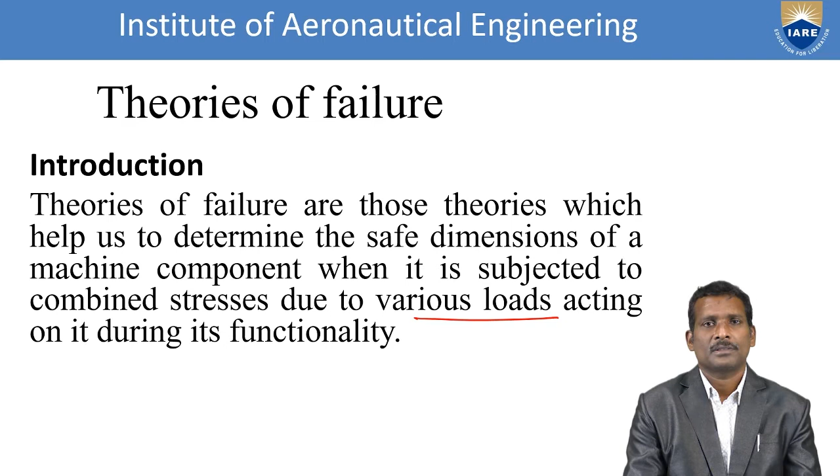So safe dimensions. That's why we use the theories of failure to determine the safe dimensions of a machine component. These theories of failure are very important in design of machine elements; they play an important role. Some theories were derived, and the important theories we will discuss now.

Some examples of such components are as follows: IC engine crankshaft, shaft used in power transmission, the spindle of a screw jack, bolted and welded joints, and ceiling fan rods. These are some examples only. You can also take the piston, the connecting rod and the crankshaft, and then clutches and brakes. These all are machine components and design elements.

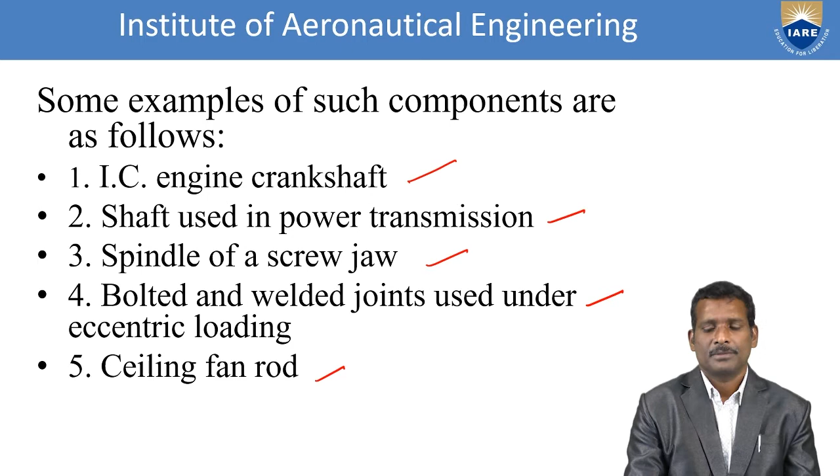The theories of failure play a key role in establishing the relationship between the stresses induced under combined loading conditions. Combined loading means sometimes the component is subjected to bending load only, sometimes to torsion load, and in other cases torsion as well as bending combinedly act on the component. These types of loads are called combined loads.

In this condition, the properties obtained from the tension test, like ultimate tensile strength and yield strength, which we have calculated from the UTM, are standard tensile test values. For establishing the safe conditions in theories of failure, we use these stresses. Relating the stress induced under combined loading to the yield stress and ultimate stress obtained using the tension test is what are called theories of failure.

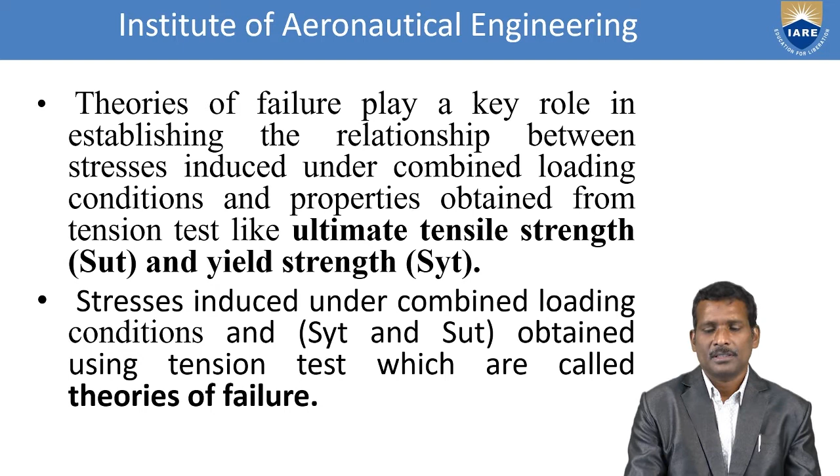Various theories of failure are there. One is the maximum principal stress theory, also known as Rankine's theory. The second one is maximum shear stress theory, also called Guest's theory or Tresca's theory. The third one is maximum principal strain theory, also called Saint Venant's theory. Then the total strain energy theory, Haigh's theory, and the maximum distortion energy theory, von Mises and Hencky's theory. These theories are derived using experimental results.

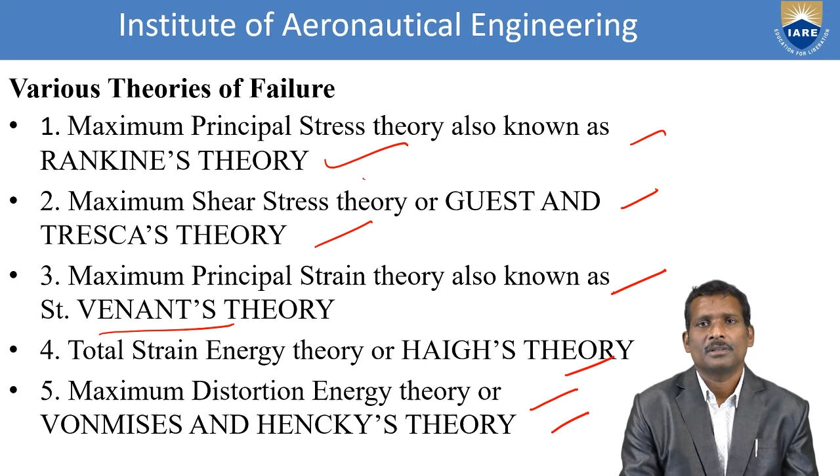Out of these theories, frequently we use the maximum principal stress theory, Rankine's theory, the maximum shear stress theory, and von Mises and Hencky's theory. All are important, but it depends upon the application. First, we'll discuss the maximum principal stress theory. What is the safe condition for this maximum principal stress theory?

Suppose you want to design a shaft using this maximum principal stress theory. Designing a shaft means determining the safe dimensions of the shaft. What are the important dimensions of the shaft? The diameter. The diameter is a very important parameter in a shaft; the length may change. So that's why the condition.

What is the condition for failure? The maximum principal stress value and factor of safety equal to 1. What is the condition for safe design? The factor of safety greater than 1. The factor of safety value should be greater than 1 only. So to avoid failure, for safe dimensions, you have to take the principal stress value with a factor of safety always greater than 1.

The maximum principal stress must be less than or equal to the permissible stress, where permissible stress is equal to failure stress divided by the factor of safety. So this is the condition for maximum principal stress theory: sigma 1, the maximum principal stress, is less than or equal to failure stress by factor of safety.

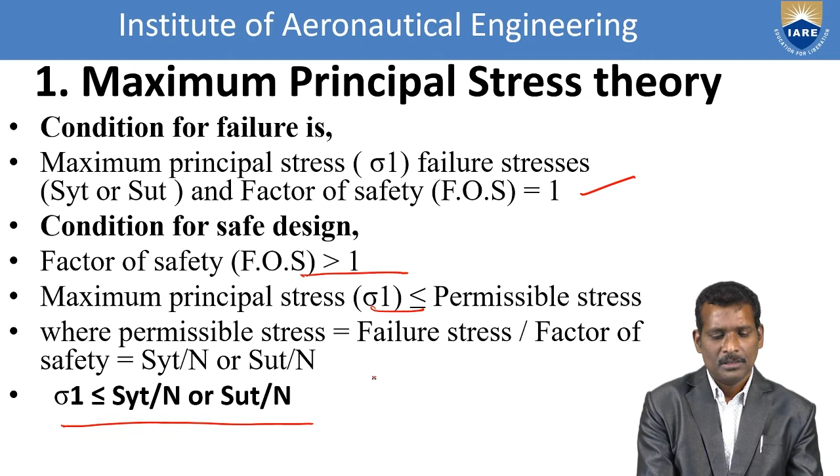This theory is not suitable for ductile materials, suitable for brittle materials only, under triaxial or biaxial loading conditions. Sometimes the component is biaxially loaded or triaxially loaded, so this is suitable for both conditions, because brittle materials are weak in tension. This is not suitable for the safe design of machine components made of ductile materials, because ductile materials are weak in shear. That's why the maximum principal stress theory is used for brittle materials only.

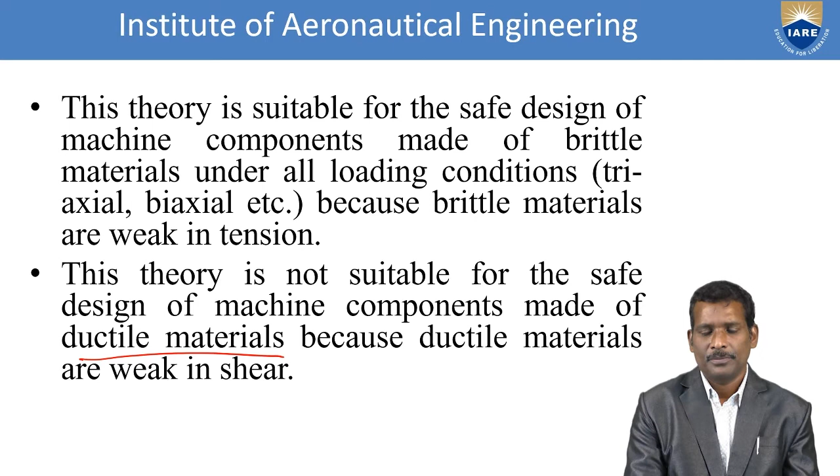But in some cases, this theory can be suitable for the safe design of machine components made of ductile materials under the following states of stress only: uniaxial state of stress and biaxial state of stress, when principal stresses are like in nature. The absolute maximum shear stress is equal to half of the principal stress value. One more condition: under hydrostatic stress condition, the shear stress in all the planes is 0.

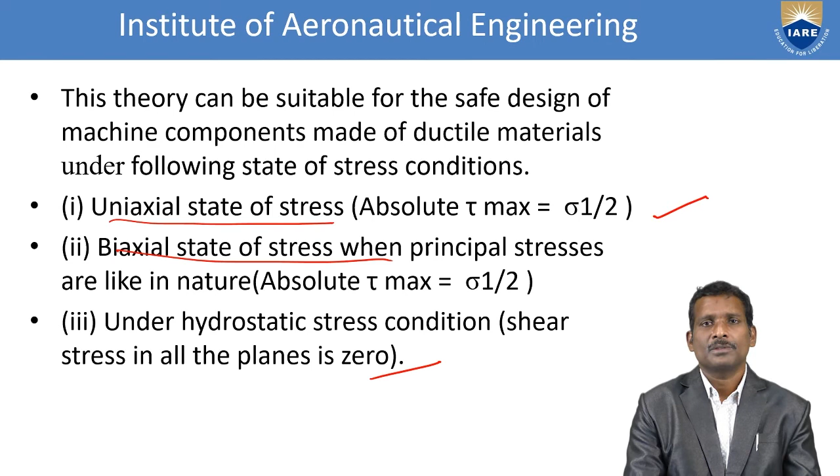Whenever the component made of ductile material is subjected to loading under the following stress conditions, uniaxial, biaxial, and hydrostatic, then only you can use this maximum principal stress theory. Otherwise, you can't use it.

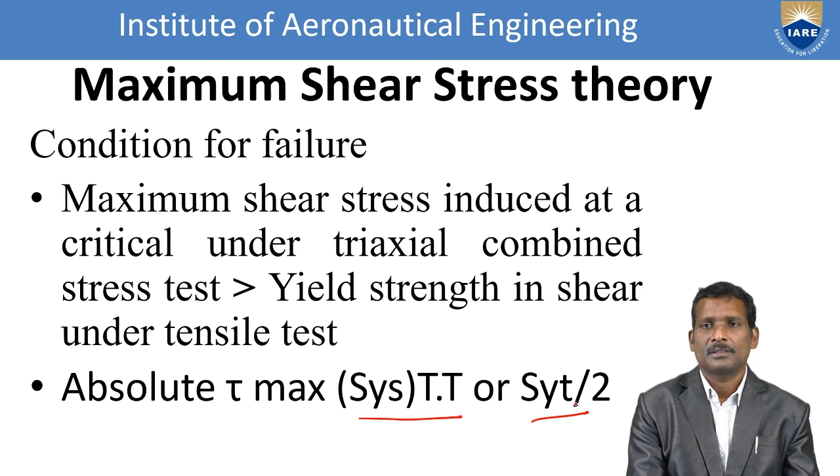Next, the second one is maximum shear stress theory. First, we will see the condition for failure and the safe condition. Failure occurs when the maximum shear stress induced at a critical point under triaxial combined stress is greater than the yield strength in shear under tensile test. The absolute maximum shear stress under tensile test is equal to half of the yield stress.

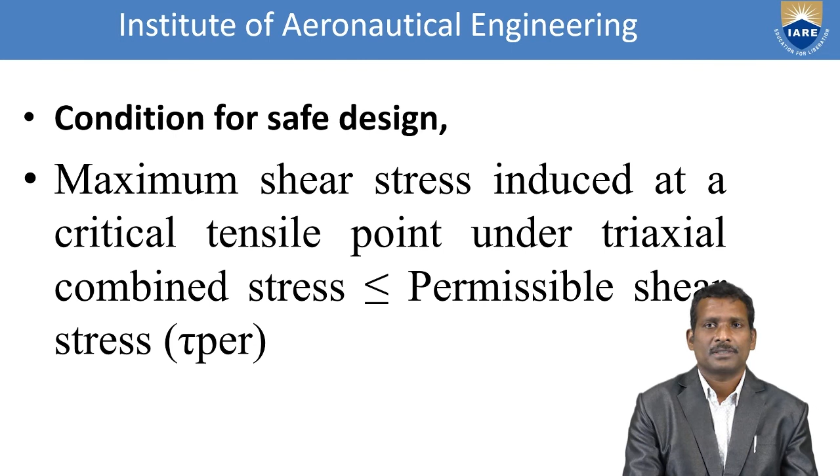The condition for safe design is that the maximum shear stress induced at a critical point under triaxial combined stress is less than or equal to the permissible shear stress. The permissible shear stress you can calculate using this relation. So the condition is shear maximum less than or equal to yield shear stress in a tensile test.

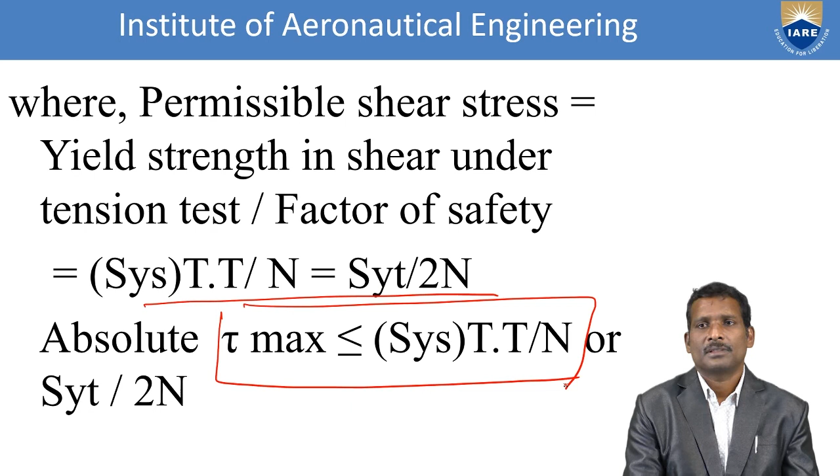For triaxial state of stress, take the larger value of these three: sigma 1 minus sigma 2 by 2, sigma 2 minus sigma 3 by 2, and sigma 3 minus sigma 1 by 2. Whichever is higher, that value should be less than or equal to the yield shear stress, 0.5 times SYT, upon factor of safety.

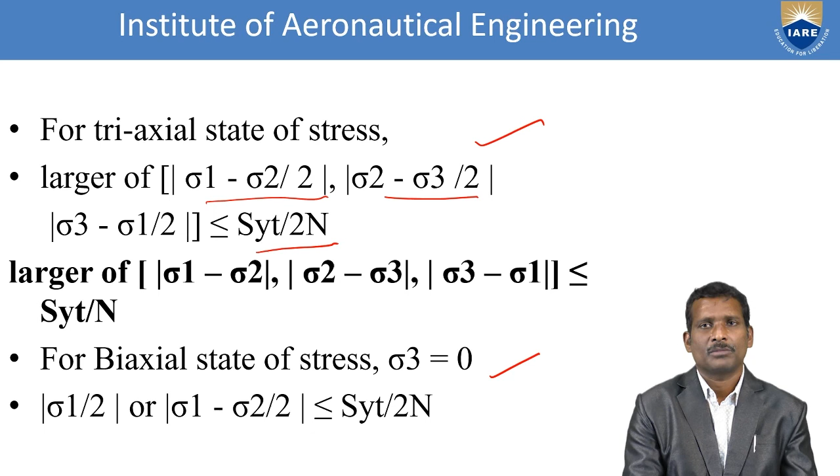That is for the triaxial case. For biaxial state, sigma 3 is 0, because the loading acts in two directions only, x and y, giving sigma 1 and sigma 2. In the triaxial case the load acts in three directions. Sigma 1 should be less than or equal to SYT by n when sigma 1 and sigma 2 are like in nature.

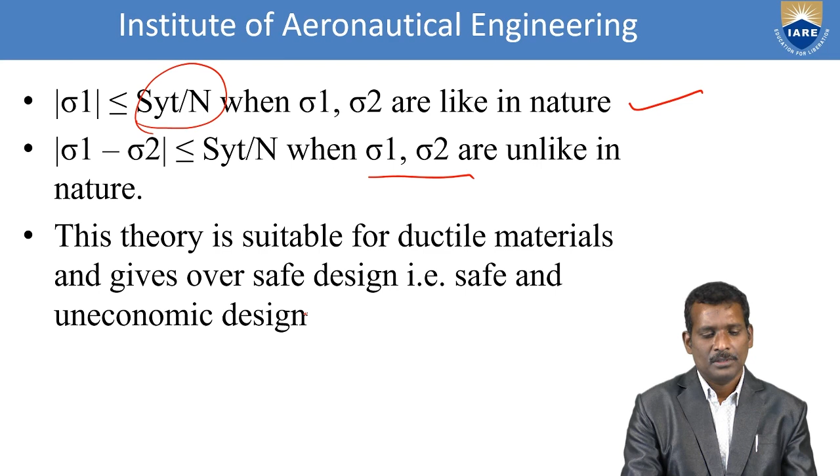Another condition is sigma 1 minus sigma 2 should be less than or equal to SYT by n when sigma 1 and sigma 2 are unlike in nature. Sigma 1 and sigma 2 are the maximum and minimum principal stresses. This theory is suitable for ductile materials. It gives a safe but uneconomic design. So these are the theories we use in the design of machine components.